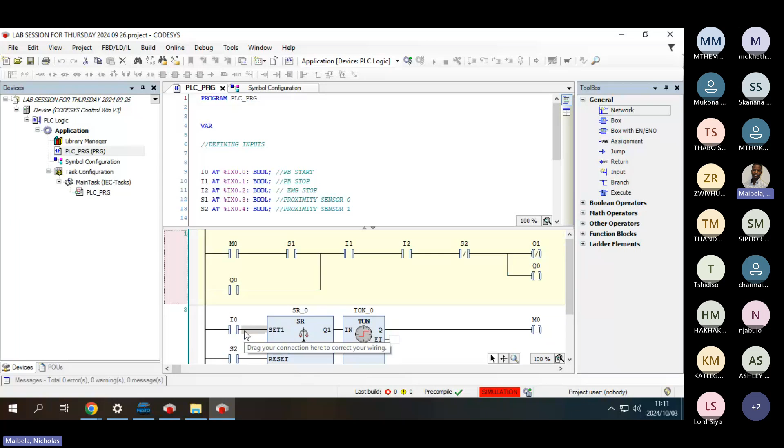Now, one thing you should get in the habit of is always having a stop button when you are delaying advancement of your cylinder. So here, what we need to add is our stop button. If we add it, you'll realize we can stop our process anytime, even before the timer completes its 5 seconds. So before we go to the next exercise, we're going to put in a stop button and see how our circuit functions.

Okay, let me just open my preparation here.

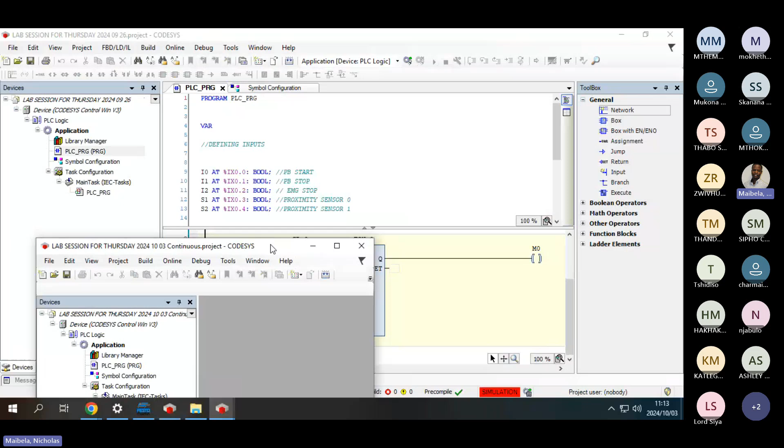On your Festo software, you might want to check if you're on OPC mode, because otherwise your program and the software won't communicate with each other. Let me check if my OPC is working. You'll always find that once you close your program and save it, the next time you open it, you won't be on OPC mode, and this is the mode you should always be on.

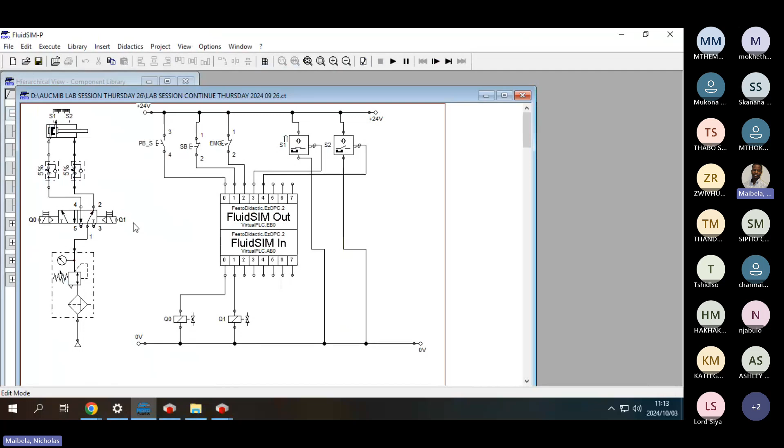I'm just going to click OK. I believe all is set. Then you'll see that on your modules, FluidSIM Out and FluidSIM In, it'll go back to its initial state of VirtualPLC.EB0 and VirtualPLC.AB0. I'm just going to extend that.

So remember, for this exercise, we are getting a stop button. So let us put it under our I0.

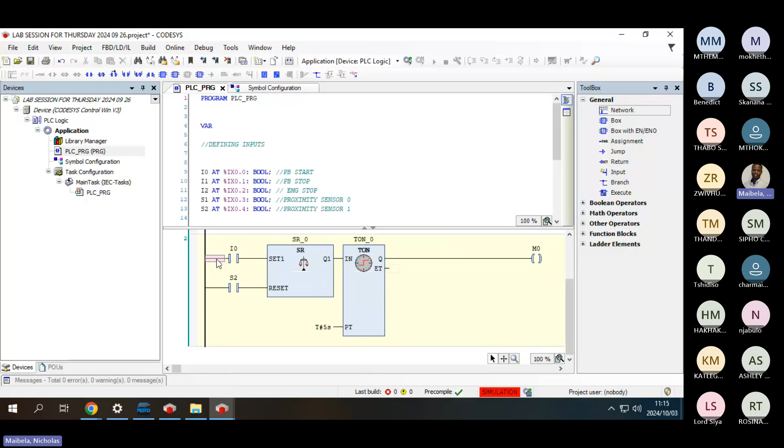You'll insert a negated contact parallel below, because your initial state is always on. For your stop buttons, it's normally closed, so for normally closed states we negate them when coming this side of the ladder logic. So insert negated contact below, and this is our stop button, I1.

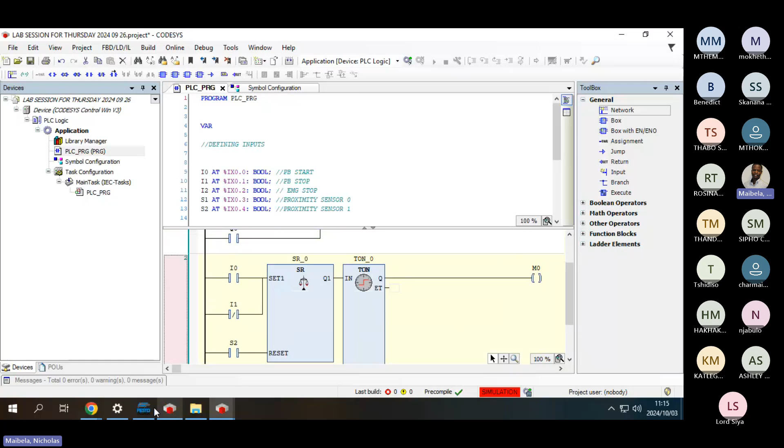What should happen is once we start, as the timer starts counting, if we press the stop button it will stop the whole process, so that we're in control of our system. I'm just going to go to build - always get in the habit of building before you run your model.

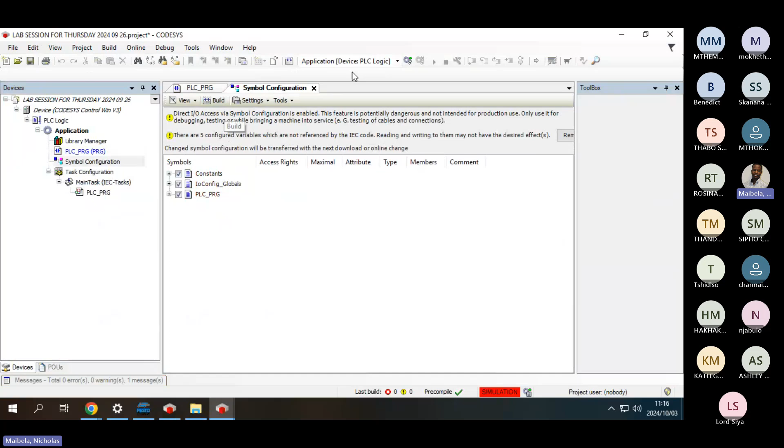Then I'm going to log in, download, then click yes if you see this pop up, then press play.

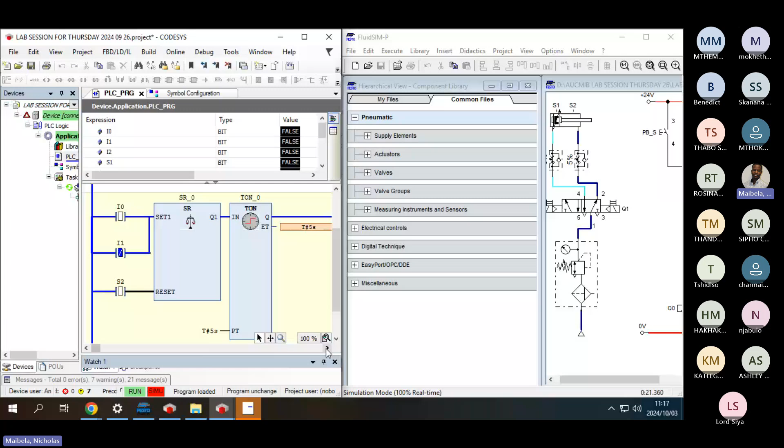I just want to see the timer. So if we press start here, okay, let me just fix this.

So actually, let's run. I connected the stop button in series, not in parallel. You shouldn't change that contact; it should be a normally opened one like that.

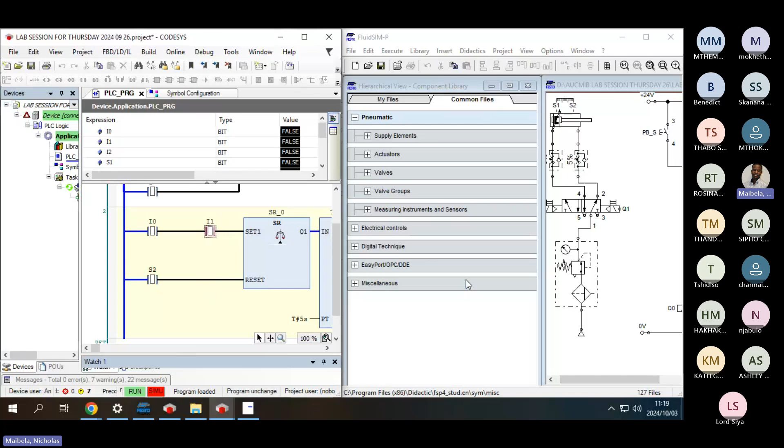This one is just showing the stop button. So, and then you're going to connect them, yeah, like this.

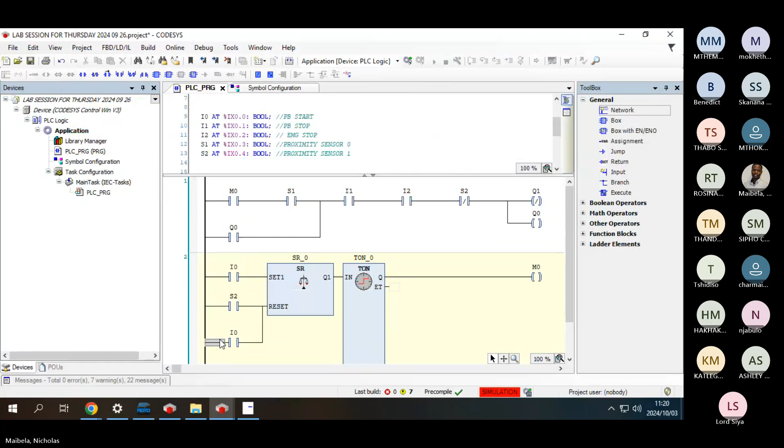Okay guys, so we should actually connect the stop button and the emergency stop in parallel with our sensor. This will allow us to stop our circuit at any time. I'm just going to connect that and run our circuits.

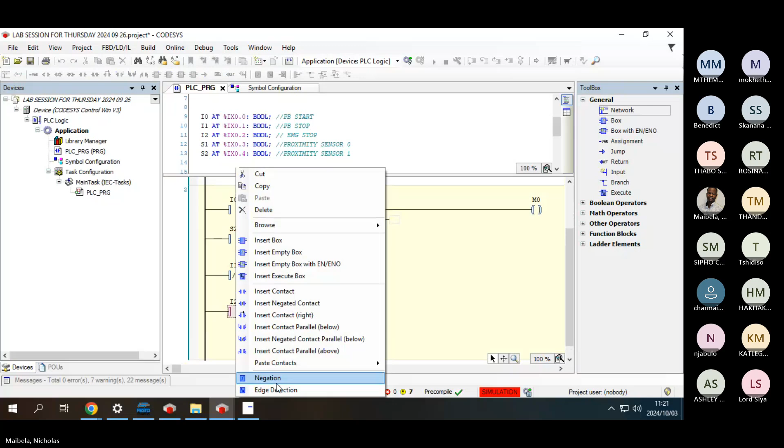Before I forget, let us negate that. Okay, and then let us log in with download, then press play. I'm just going to split these screens.

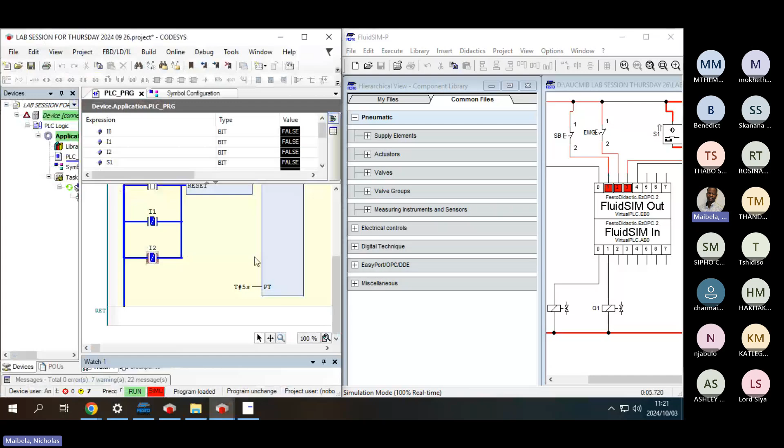Okay, so I'm not getting communication. Let me just fix the communication on this side.

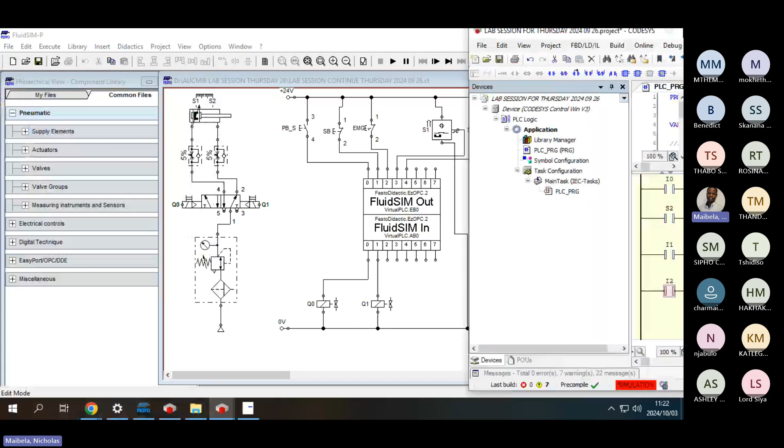Sorry? Okay. Is it not breaking the connection?

The communication is not there. It's actually here. Okay, it's awesome.

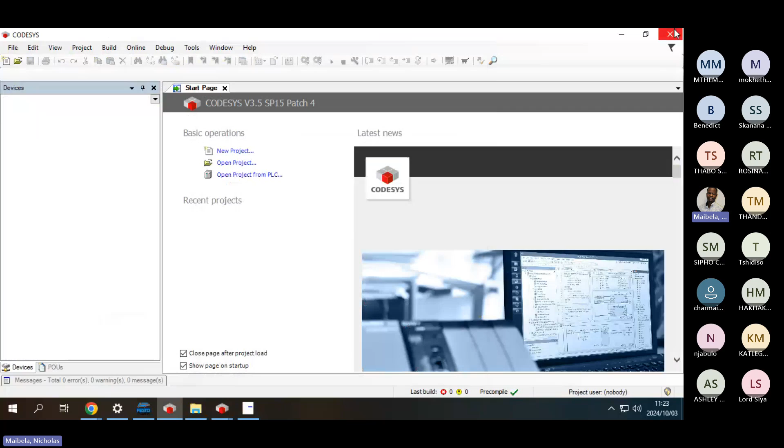Let's double check it. Okay guys, so we have now established connection. We are connected to the local host.

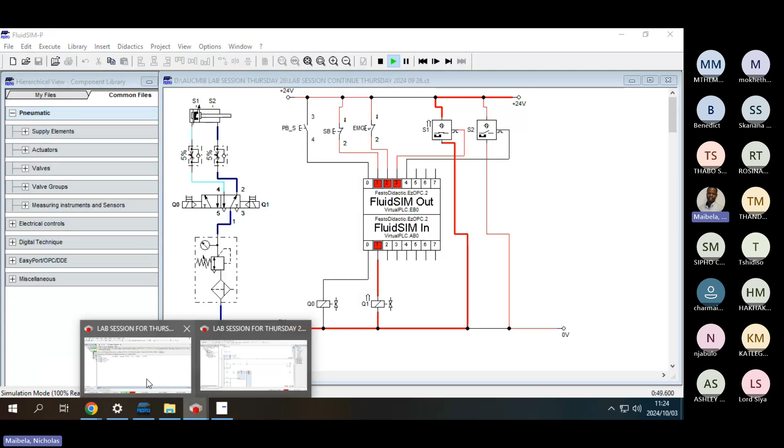Okay, let me just go back to my model. Okay, so if we can try to run it now, run our Festo or FluidSIM.

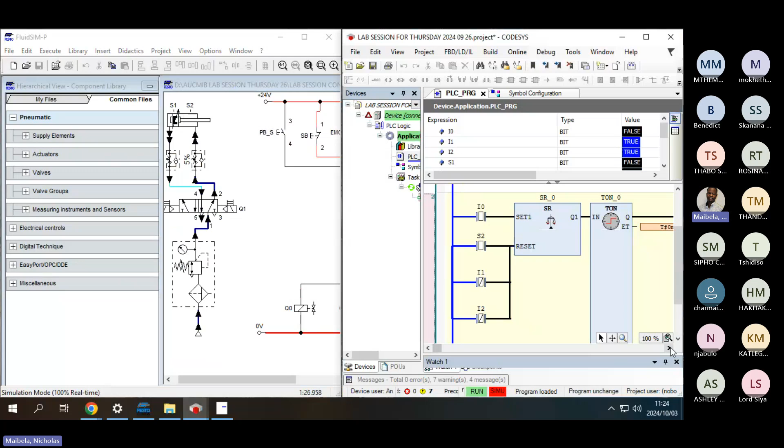So if you can observe that our advancement is delayed, right? But now that I introduced our stop button, our start button and emergency stop button, if you can observe, I will just restart the whole process again. If you can observe what will happen, so let me just run this.

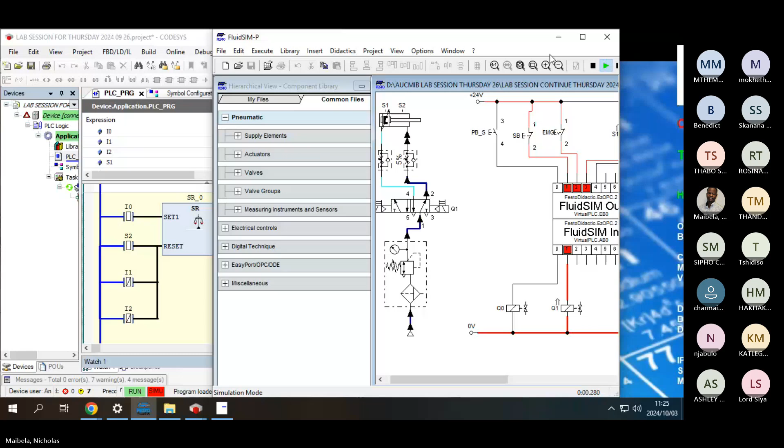Okay, so if I press start, you check the timer. Okay. Okay. No, leave that. Yeah. Come here. Take care. Okay.

All right guys, so if I press start, I want you to observe something, right? Observe the timer and observe when I press stop.

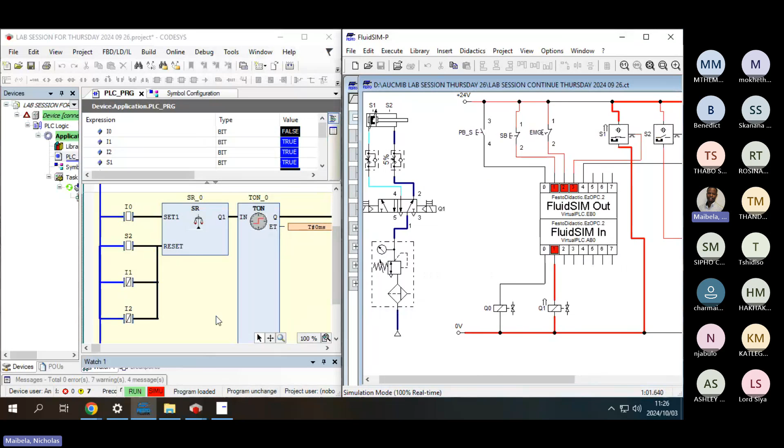So before the counter stops counting, if you press the stop button with this connection that we have modified, your advancement will not start, right? But we are doing this so that we can have complete control over the system, right? So it's always a must. It's always important that you have stop buttons, right? If you don't have stop buttons, you won't be in control of your process, right?

And even for your test, make sure that you always have some kind of a stop button, either the two. But it's important to have. You can have one, but it's important to always have the two stop buttons: your stop button and your emergency stop button. Remember your emergency stop button.

Once you activate it, your system can never work again up until you reset your emergency stop button. So that's the reason why we have two push buttons. With the stop button, what it does is just stop, but you can start at any time, right? So that's the difference, right?

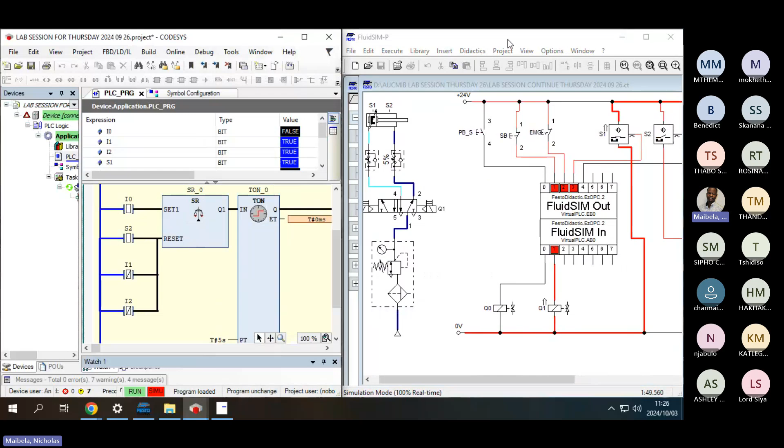Now for today, what we'll be doing, we'll be modifying this in a sense that we will be delaying advancement, retraction, right?

Okay, so in this case guys, what you must know is that what sets your retraction to be delayed is your sensor 2, right? Proximity sensor 1, right? So what will alter here is that we'll replace I0 with S2.

Let me just go out of simulation mode. So now we are delaying retraction, right? Remember, in advancement, it was I0 that was responsible for delaying our advancement, right? But now it's S2 that is delaying our retraction, right?

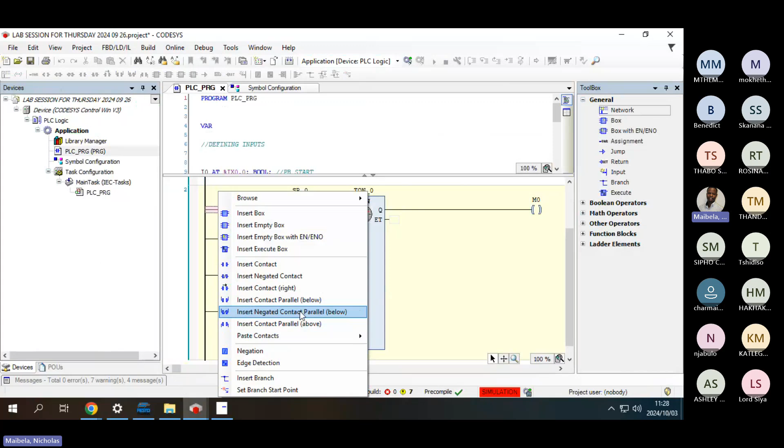Trying to... okay, so actually it's here.

Okay, so we'll now swap our memories. So I0 comes back here, right? And then we're saying S2 is the contact responsible for delaying retraction, right? So we swap that with S2, right? And then we have this kind of a second.

Okay, where did I lose you? So now we're doing a delaying of retraction, guys. Remember, in the previous one, it was I0 setting our timer, right? But in this case it's sensor 2, right? That will delay retraction. So once our cylinder gets to sensor 2, that's when our counter, our timer, will start running. And then once it reaches 5 seconds that we've defined here, it's gonna retract, right?

And then what will stop that whole process is our I0, which is our start button, our sensor 1. I mean our sensor 1, I don't know why I'm doing that. So it's not I0, it's... yes it's I0 along with sensor 1 here.

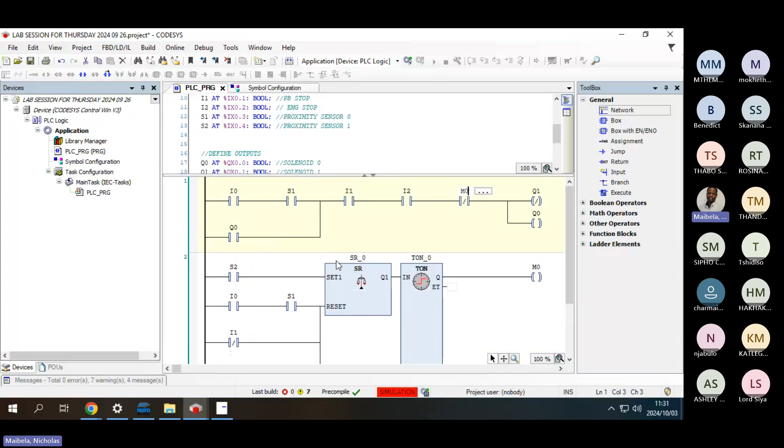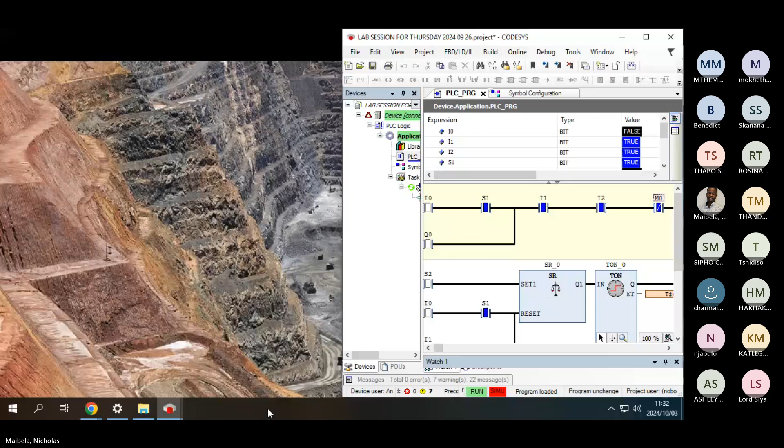And then download, log in with download, then click OK, and then press play. Okay, so I'm just gonna split my screens and just... okay, let me just do this.

Is it doing as it's supposed to do? Huh? Yes, no. Do I have a yes? Okay.

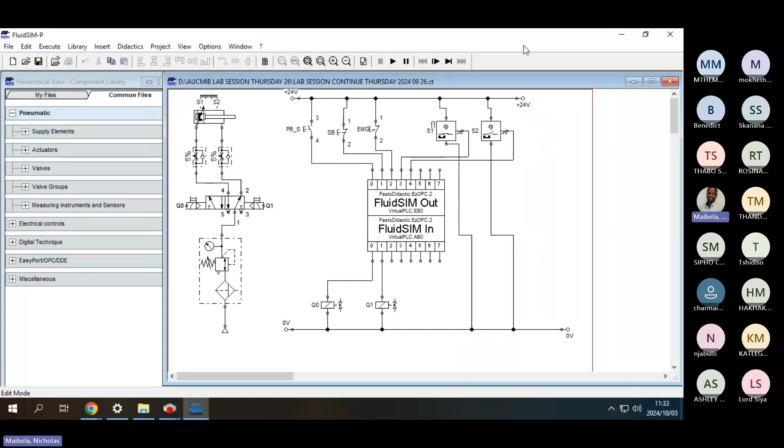The ones that have done it, can you show the other guys your connection? Just look at the connection first. Make sure your contacts are correct.

Okay, so I'm gonna run on my side. Okay, if I can press play on my side, this side,

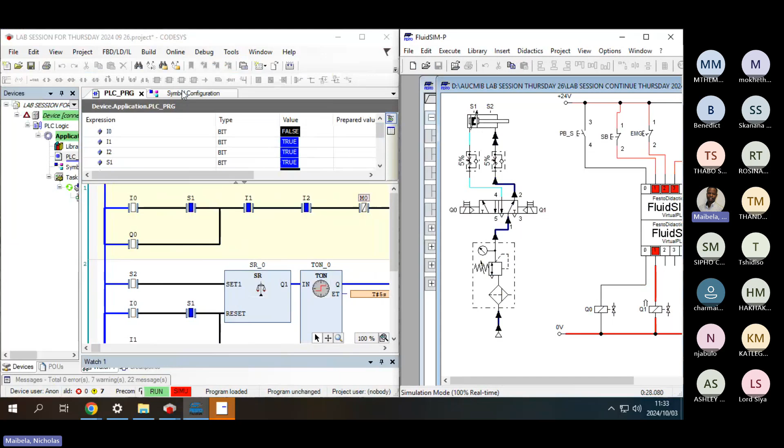it advances, and then look at the timer there. It advances, and then counts down, and then once it counts down, it goes back, right? So I'm just gonna show you the network so that you can check the connections.

The lady there, did you connect like this? Hmm? I'm saying you. I'm talking to you. But like your OPC, is it connected?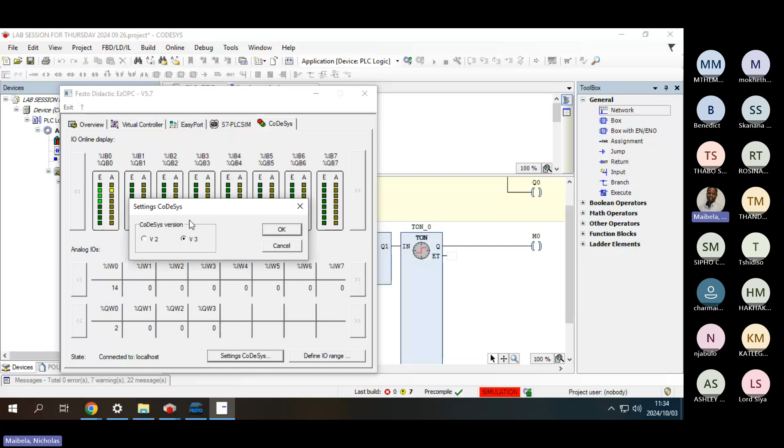Connecting to local host. Just try to, what's this? Let me see. Is it on version 3?

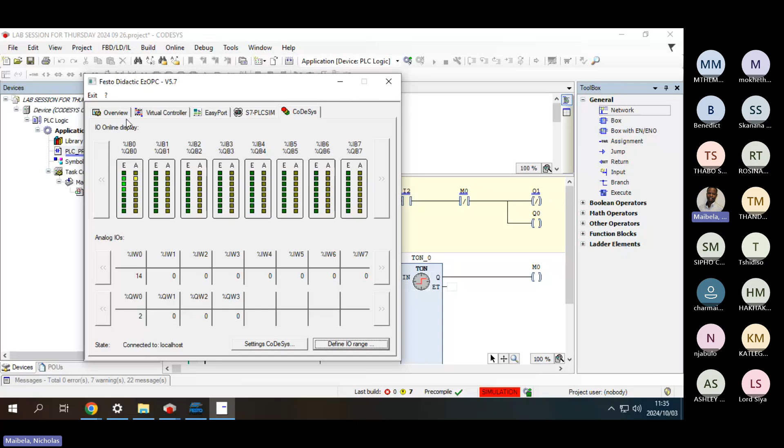Because you should be connected to the local host. The guys this side, is it connected? Yes, it's now connected to localhost.

Yeah? It's connected. And then is your circuit running accordingly? Okay, can you check your connections there? It's definitely your connections, because mine is running this side.

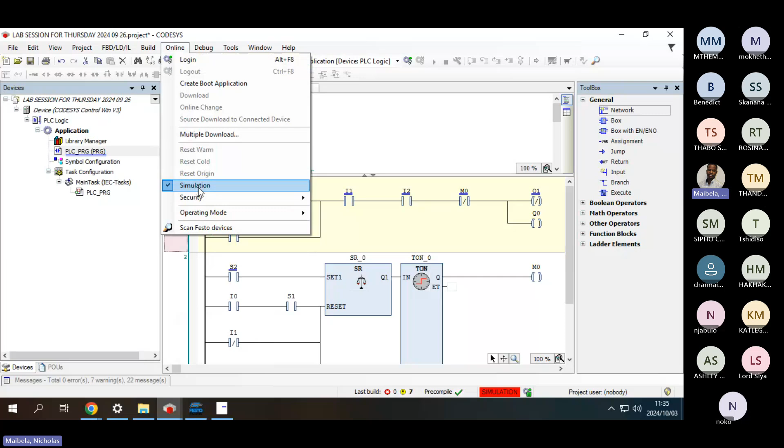Otherwise, just close it. Also, make sure you're on simulation. Are you? It's fine.

Okay, let me check something. And then your fluid sim, is it EB0, AB0? Your modules, is it EB0, AB0?

If everything is fine, I think it's like a troubleshooting issue. Just try switching it on and off and see if that works. Like save all your projects, and then open them again and see if it works.

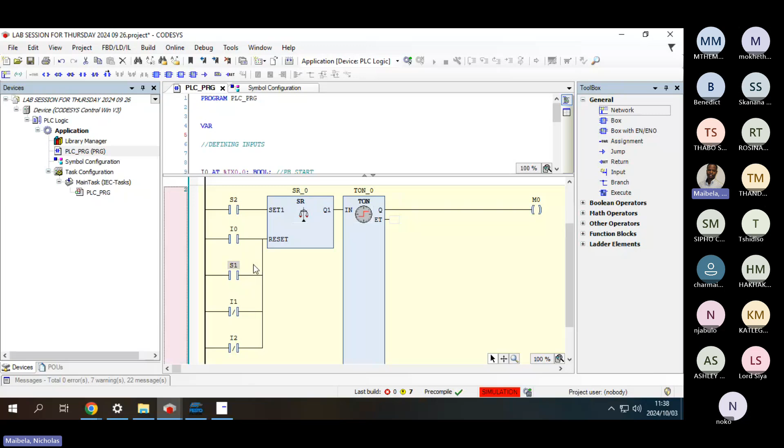So if you can run it again, it should run more than once, right?

So as you can see, I advance and then it goes back, and then if you can do it again, it does the same. So the problem is with the parallel connection.

It's working in series connection.

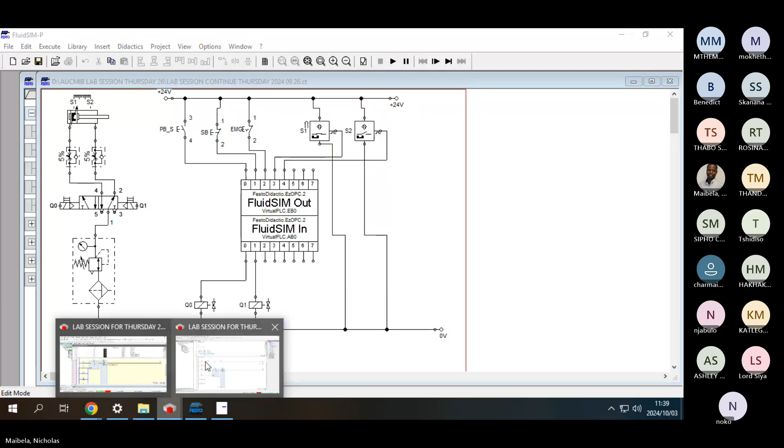Okay, if it's running, then it's running, right? But apparently you have to—it's best practice to put it in parallel, right? But if it's running, that's also good.

Okay, so the next exercise that we'll be doing is continuous running of your circuit. So in the scenario of having a lot of products, for example, going through a conveyor belt, and you want to maintain your cylinder running continuously up until you want to stop it, this is when we do that, right?

So now we're gonna do it's sort of an infinite loop. So your system is running forever, but you can always choose to stop it at any time, right? So now we'll be doing a continuous circuit, right, that runs forever, right?

So okay, so how you'll do that is you will start. Let's first go out of simulation mode.

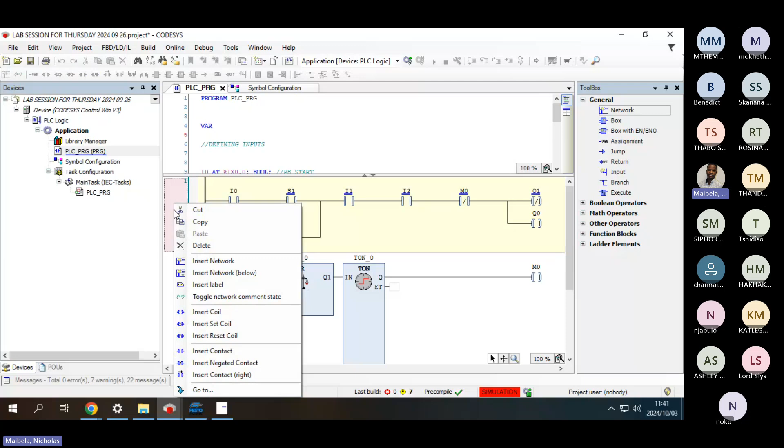So how you'll do that is you will create a stop-start circuit above all your circuits here, right? So that stop-start circuit, you will latch it so that it can continuously provide power to all the other circuits. But we'll analyze that and you'll understand it better once we have created it.

So you're gonna click on the first network there on the side, and then you're gonna right click, and then you're gonna say insert network, right? And then you will see a new network above there.

Now, remember your stop-start circuit only has one output, right? So remember this, for any circuit that you're told that you need it to run continuously, you have to have a stop-start circuit above, right?

So we're gonna have—you can copy this circuit, and then you can paste it there, right? And then because it's a stop-start, we're gonna just remove this output, and then we won't need this memory.

And then we're gonna also, let me see. Okay, yeah, so this circuit here, it's your stop-start circuit. As you can see, if you can analyze it, it comprises of a start button, a sensor.

So these two here are for end position sensing, right? So as it is here, it will sense the retracted position, right? And then there you have I1, I2, which is your stop button and your emergency stop.

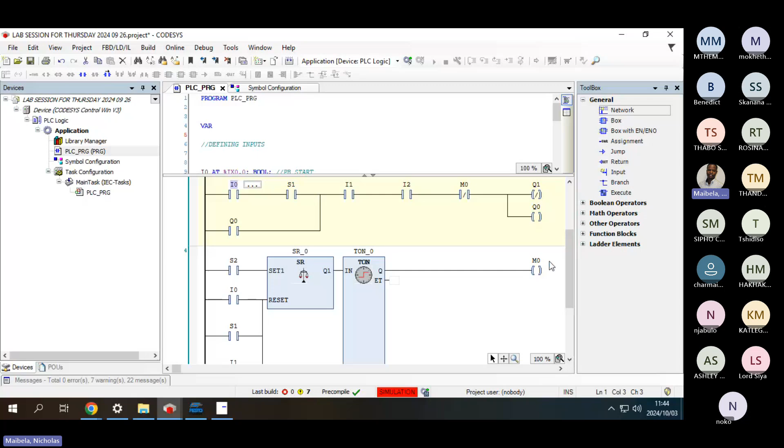Because your output of your timer is M0, right? So your output of your timer will be responsible for starting the movement of your cylinder. So we'll substitute the output of your timer to I0, right?

We can have, what's this? We can remove S1 there. Okay, we don't really have to remove S1. This is for end position sensing, right? And then we're going to have I1, I2, and then we can delete this one, right?

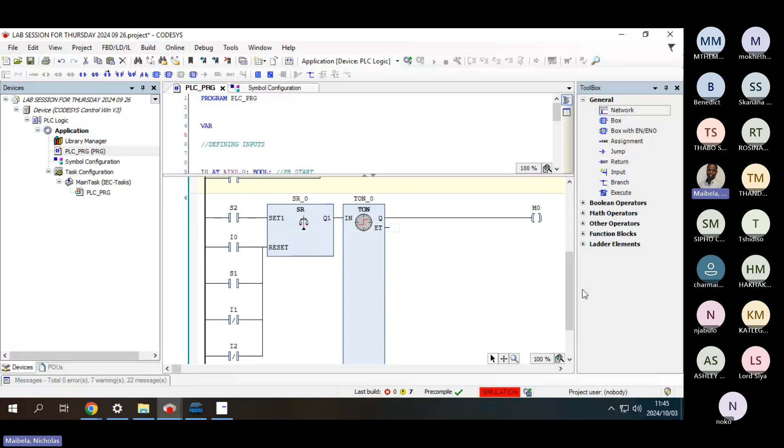And then, because remember that M1 that we defined in the first circuit, we're going to put it as a contact that sets our timer, right? So we're going to put M1 here, right? And then we'll have S1 in series, sensor 1, and then we'll have our stop buttons, right?

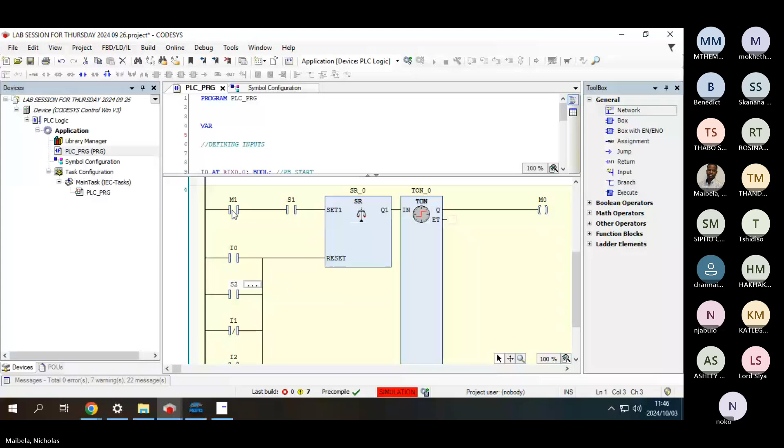So for the timer, it's S2. It's S2 that resets your timer. So we're going to say S2 here. And then we have our stop buttons, as always, right? And then with this circuit, it will run your cylinder, so it will advance and retract continuously up until you decide to press the stop button.

So just a recap, right? You create your stop-start circuit, and this stop-start circuit, its output will be memory 1. You use memory 1 because you have already used memory 0 for your timer, right? So for your stop-start circuit, you'll use your memory 1, and then you will latch it. Remember, when you latch, you use a contact, not a coil, right?

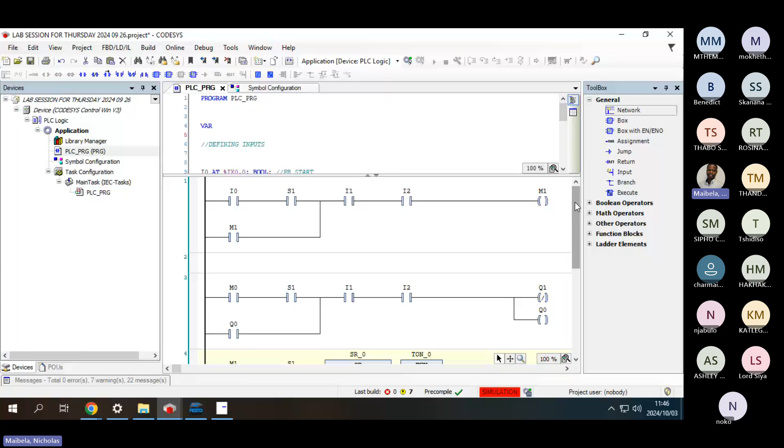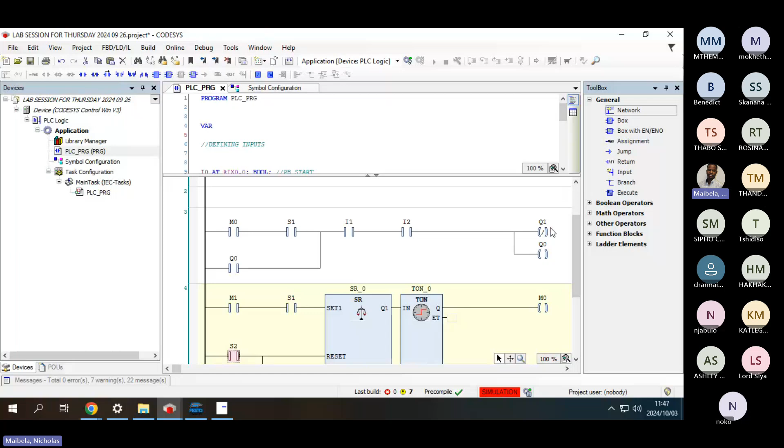And then after that, we are saying this memory 1 will be responsible for starting our timer, right? So as we press start, the cylinder will count down and then it will go forward, right? And then it will come back and so on. And then we're saying that M0, the output for M0, is your new input. It's your I0 in a way, substituted with your I0, with your start button, right? And then, as you can see, it will now be able to energize your Q1 and Q0 continuously, right?

So if we can run that and see our circuit. I'm just gonna split these screens.

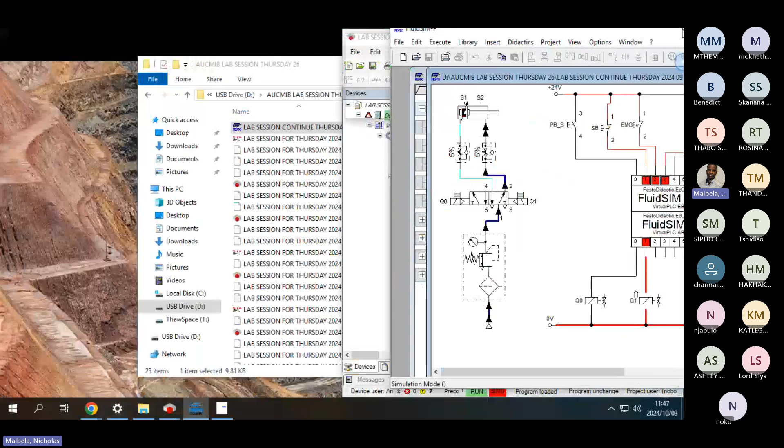Okay, so what I want you to observe is the cylinder, right? And also let's also observe the timer. So if you can press play, the timer will count. Okay, let me just stop that.

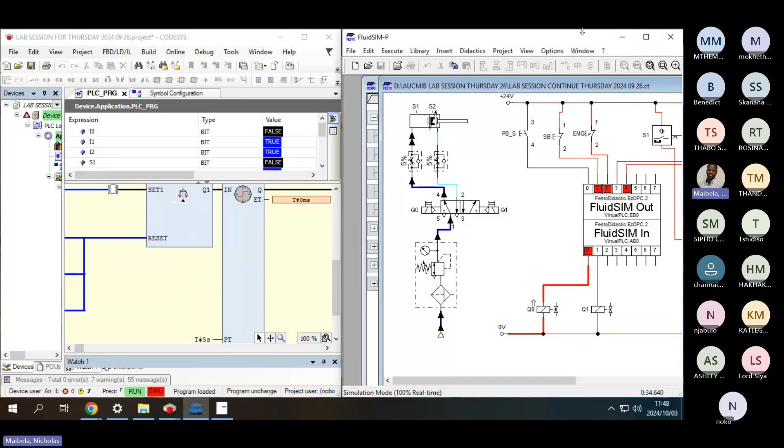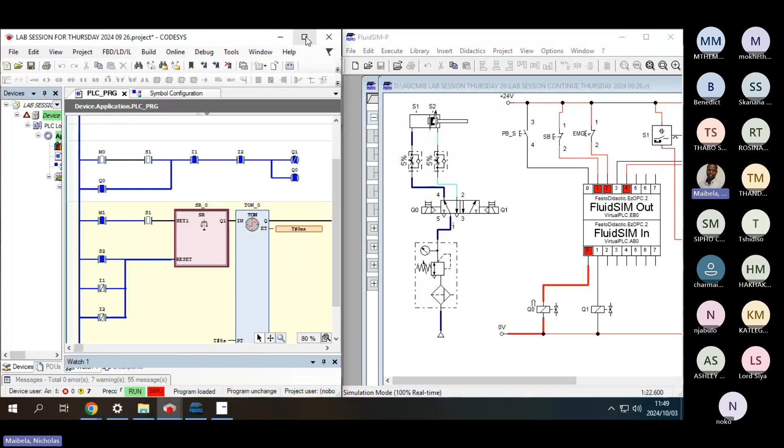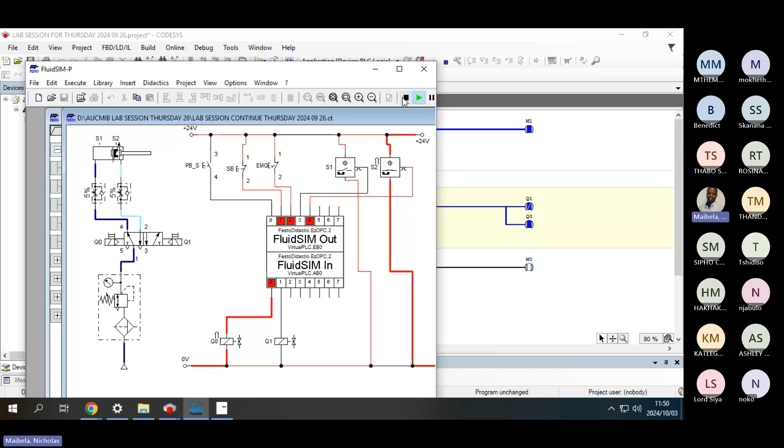Okay guys, so we don't need sensor 1, right, for this one. If you can run it, it will now run continuously, right? So it's stopping our cylinder from going back, right? So that's sensor 1, right? So if you can remove it, you will observe that it now runs continuously. Let me just restart that.

Okay, I'm just double checking on my side. Okay, so I forgot to put our sensor here, S2, and it must be negated.

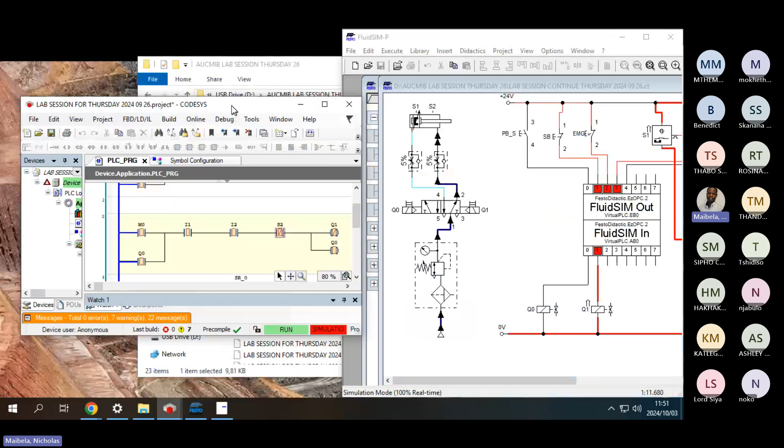Okay, then we're gonna just run that. Okay, so as you can see, okay, I think I pressed stop. Okay, so it runs once instead of infinitely.

Okay, so it runs according to how it runs correctly, right? So what happens is every time before it advances, it counts down 5 seconds. If you can observe the timer there on the right, every time before it advances, it counts 5 seconds, right?

And it will not stop up until I press the stop button. So if I can press the stop button, observe the timer there. The timer resets to 0, right? So that's how you connect your continuous circuit.

Right? So I'm just gonna press stop here, and we do the last exercise, which is we delay when it retracts, right? Okay.

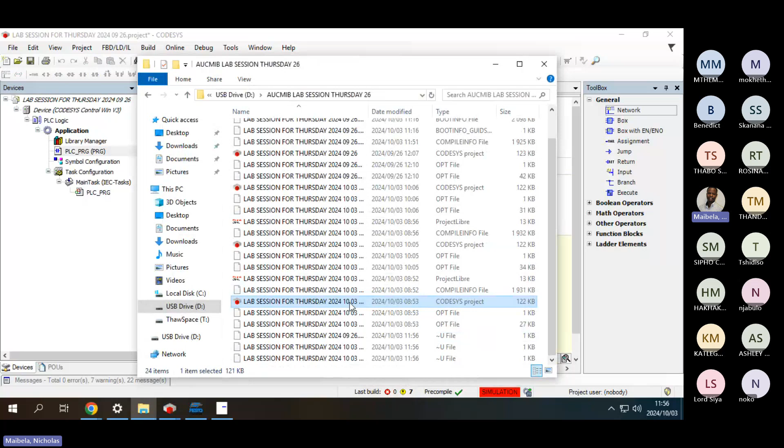Okay, let's run this and see if it will run. Otherwise, we might need to troubleshoot.

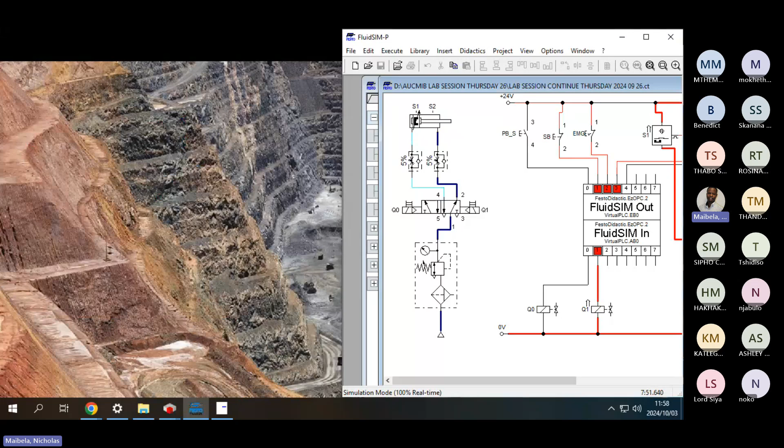So is it running? It's running once. Okay, let me check.

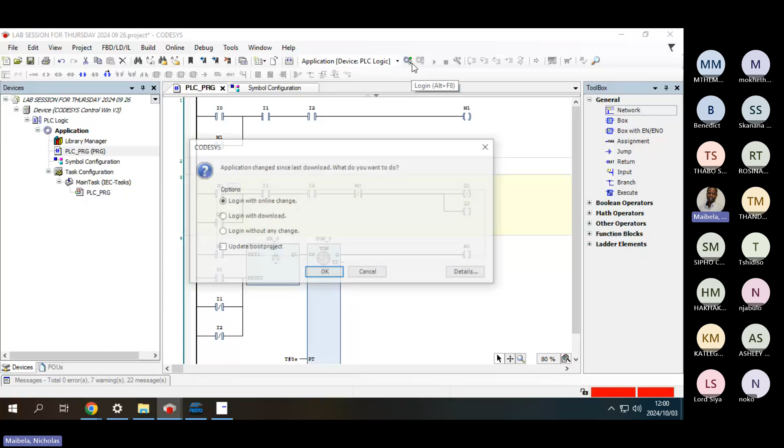So if you can run that and see what it gives you. Let me just see. Yes, you are right, I should build.

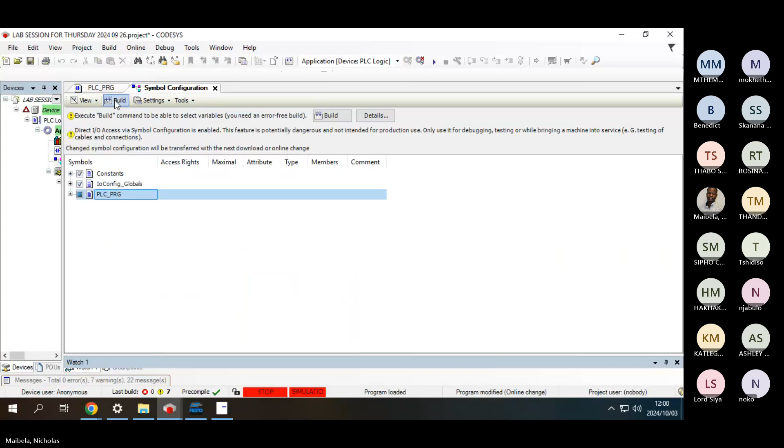If you can see here, it's not checked, right? Otherwise it won't run correctly. So let me check this box. Thanks for that.

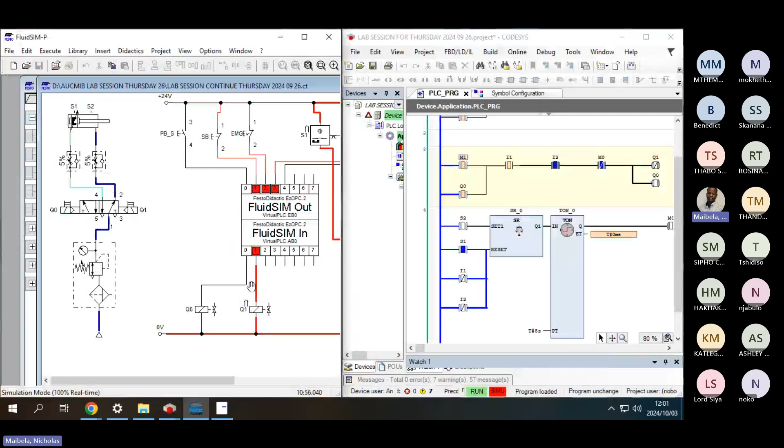Okay, let me just stop and start, and press play. Okay, let me just stop at the side. Okay, it's now running. It's now okay.

So as you can see, when it gets to the advanced position, it counts and then it goes back. Goes forward, it counts, and then it goes back.

Sorry? Which push button? You pressed one. That shouldn't work like that. So you see mine, immediately when I press stop, it stops at any time. And then when I press the push button, it works.

I think it's just a glitch, but if you can observe here, once it advances, it waits a bit, and then it goes back. And then it goes forward quickly, and then it counts 5 seconds. You can even count, and then it goes back. So it's a glitch on the CODESYS side, but it's running perfect, right?

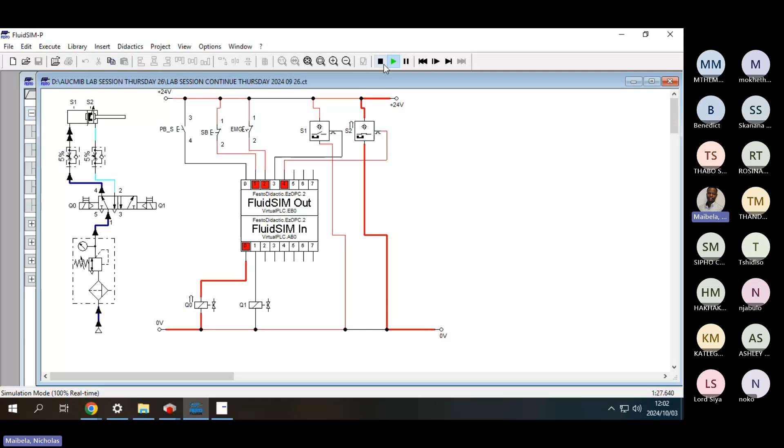So yeah, guys, just familiarize yourself with the concepts for today: continuous cycle circuits, because there's a high likelihood that you might be tested on this circuit.

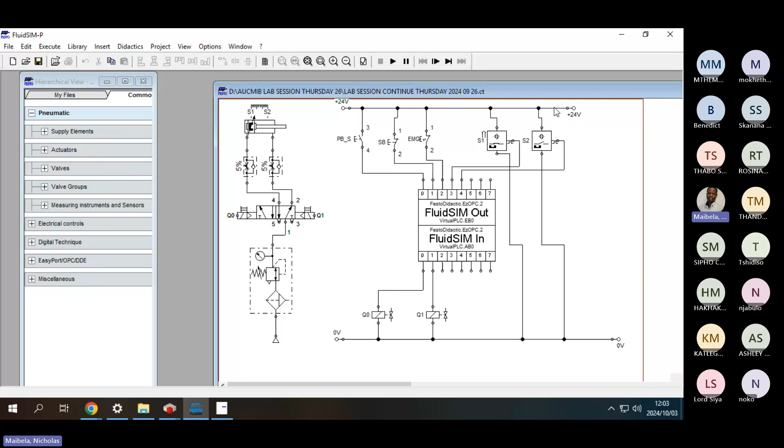No, not this one. Not this one. I'm not saying this one. But obviously, we won't give you an easy circuit. But it's based on everything that we have done. You just need to practice. That's it.

But I informed you what each contact does, isn't it? Huh?

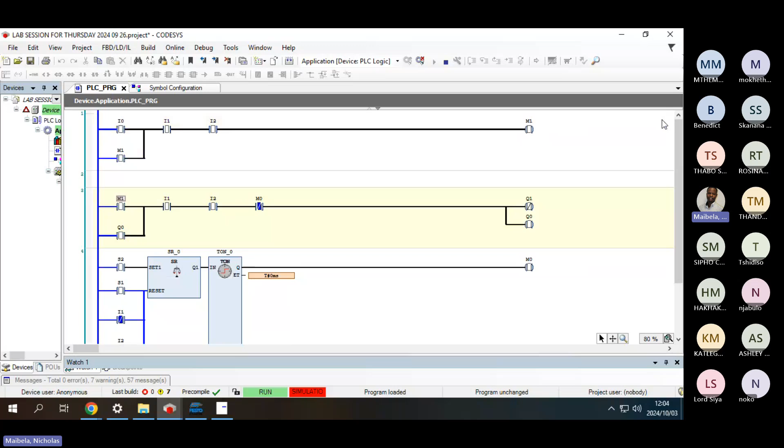Huh? Yeah, you can come. If it's not marked, I'll mark it in front of you. It's fine.